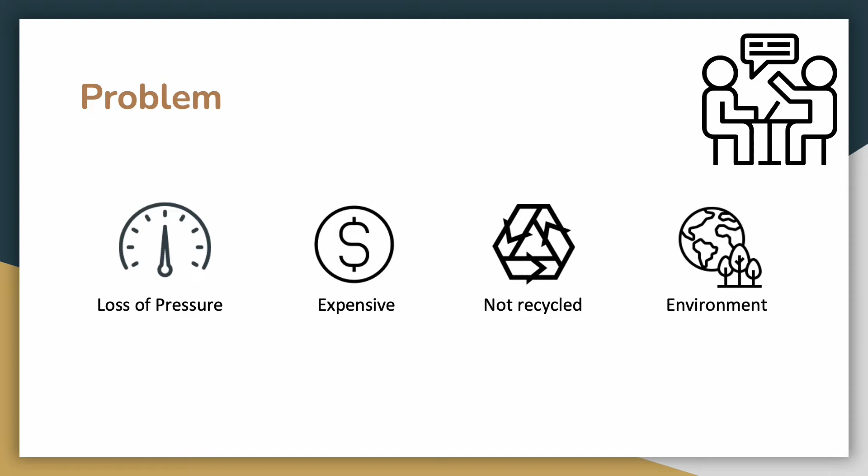A tennis ball has two failure modes. Either it loses pressure or it loses its outer fuzz. For most players, their ball will lose pressure way before the fuzz is used up. Average fuzz life is 4 to 5 times the pressure life.

Thus, our mission is to build a tennis ball recycling system that maximizes the play value of tennis balls by repressurizing used ones until their fuzz can no longer be used, which offers a cheap, sustainable, and environmentally friendly option for tennis players. We expect our customers to reduce the amount of tennis balls purchased by at least 60%.

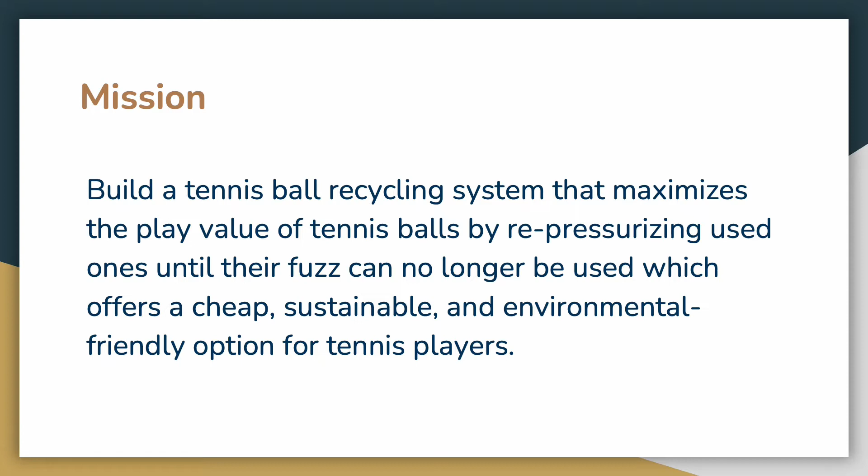The prototype of our tennis ball recycling system consists of 3 components: a fuzz detector, a pressure gauge, and a pressure tank. The fuzz detector and the pressure gauge work simultaneously to determine the fuzz and inner pressure condition of the ball, and determine if the ball is worth recycling and how long to pressurize it. If we are able to recycle it, the ball is pressurized in a pressurized tank through pressure diffusion.

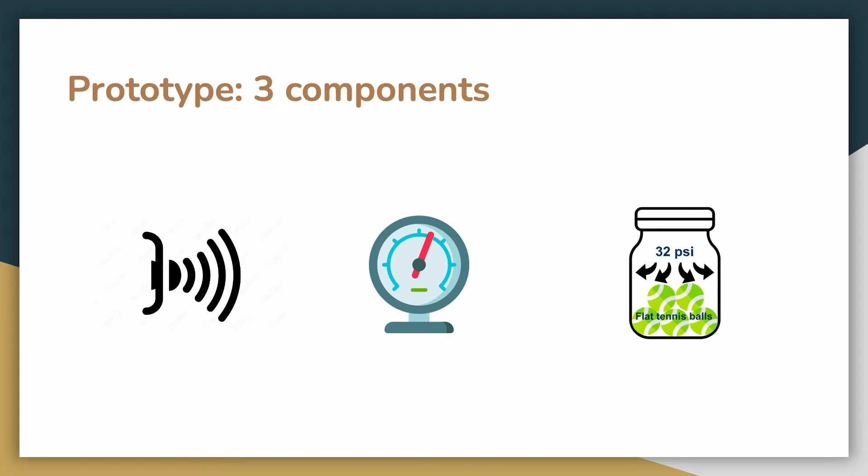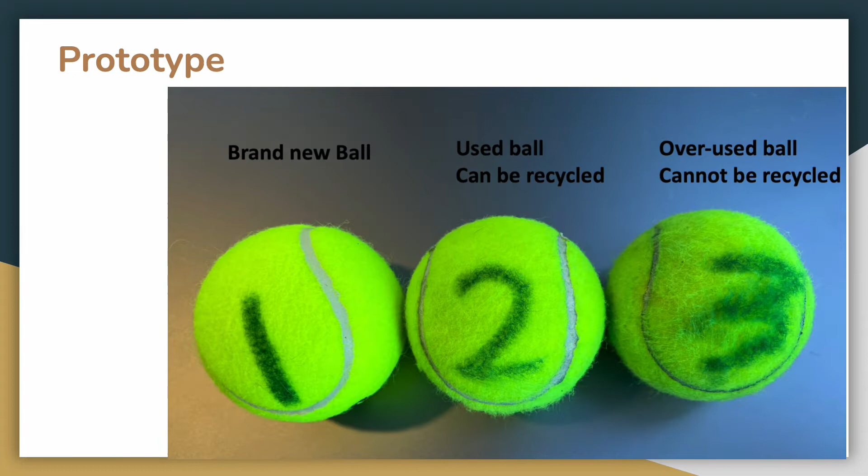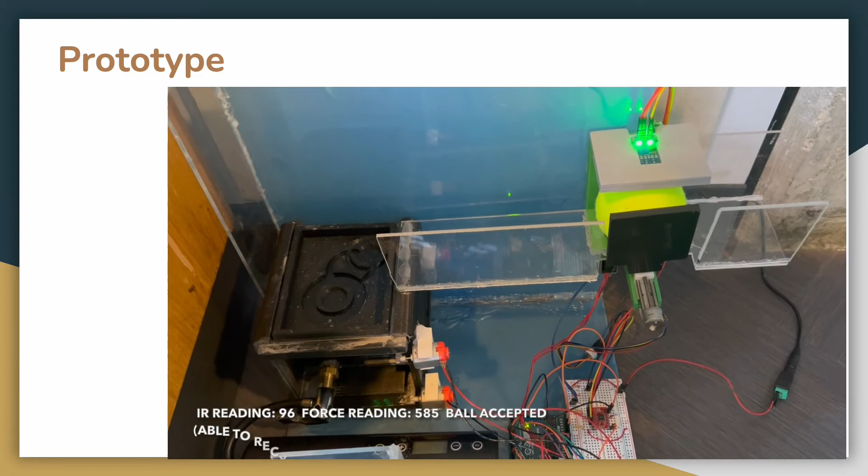A pre-recorded video is used to demonstrate our prototype. We demonstrate 3 balls in this video: a brand new ball, a used ball that can be pressurized, and an overused ball that cannot be played anymore. The first ball is a brand new ball. As it enters the station, the fuzz detector and the pressure gauge determine that it has almost perfect fuzz and pressure condition. Therefore, the gate of the pressure tank opens up, allowing the ball to enter and storing it.

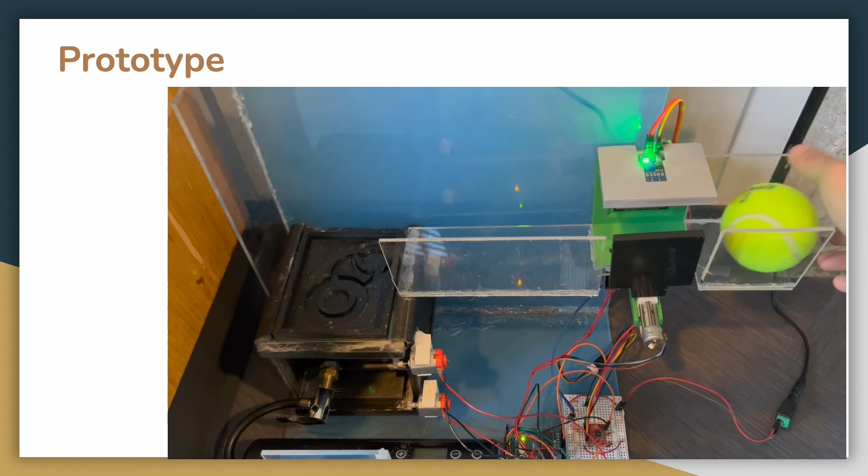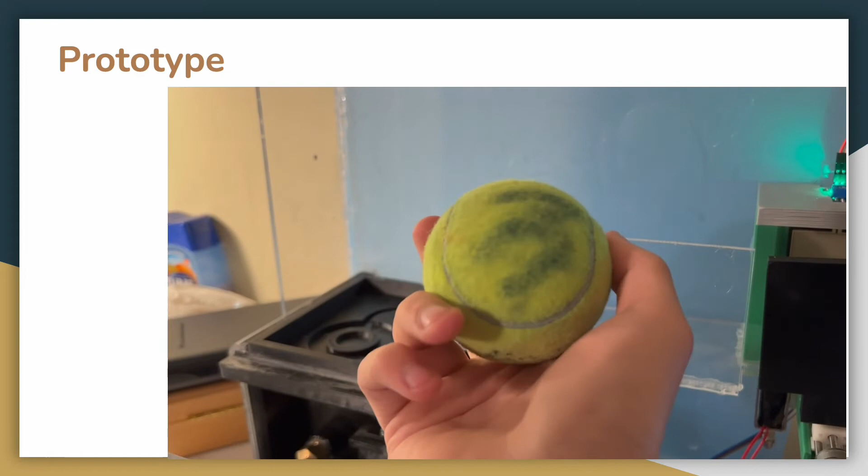The second ball is a used ball that still maintains a playable amount of fuzz but lost some level of pressure. The fuzz detector and pressure gauge determine how long is needed for the ball to recharge, and the ball is released into the pressure tank, waiting to be pressurized. The last ball lost almost all of its fuzz, thus is no longer playable. The fuzz detector determines this condition, and the ball is simply disposed without falling into the pressure tank.

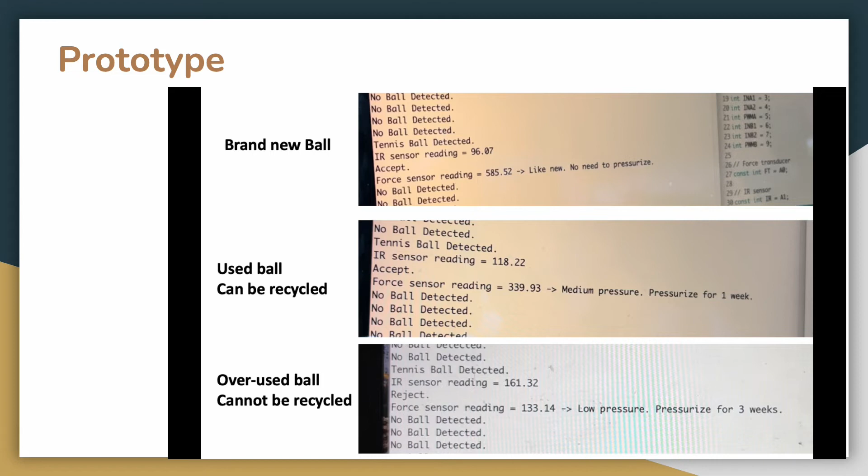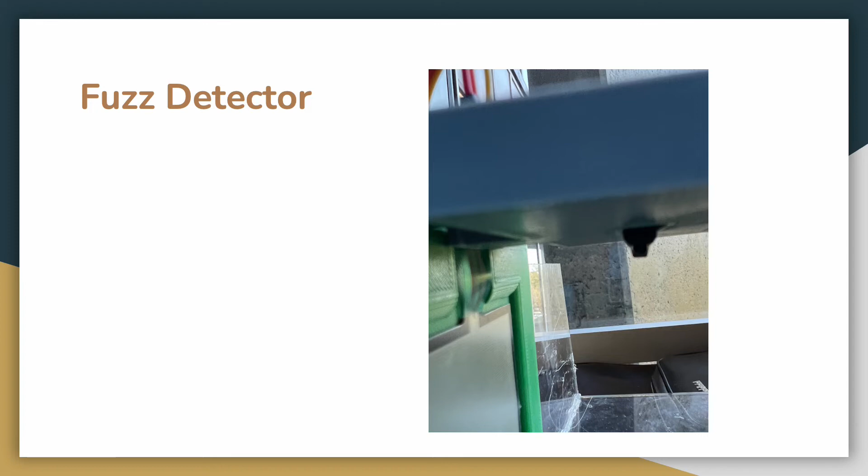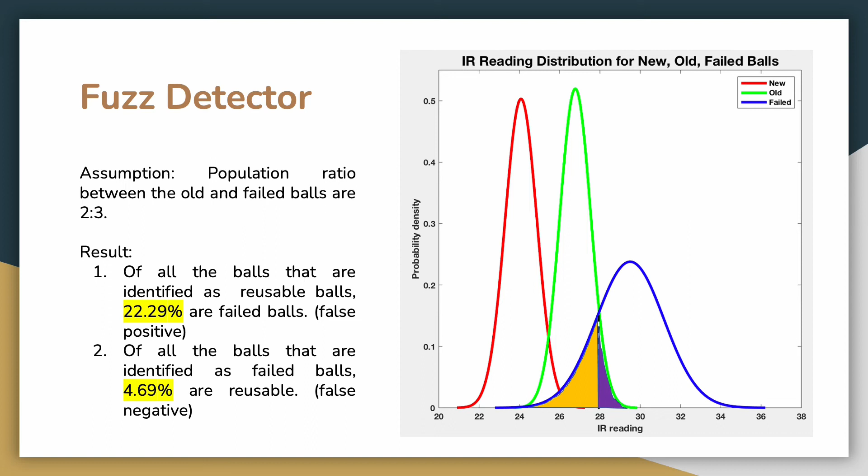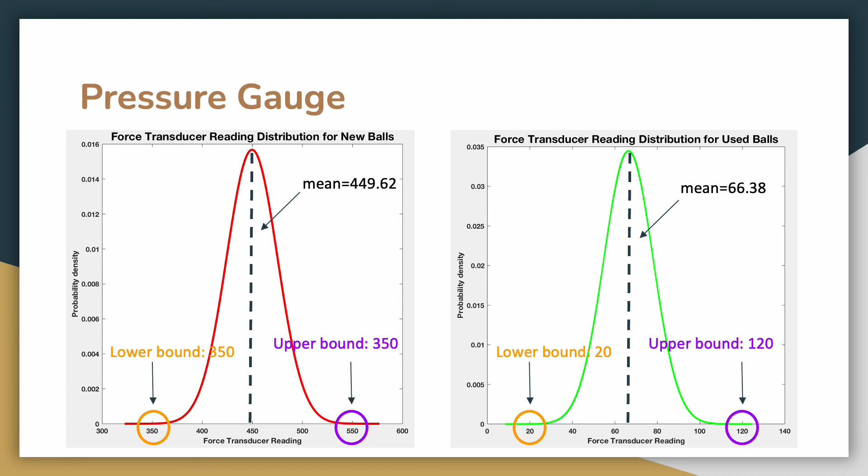The second component is the pressure gauge, which is mainly made of a press and a force transducer. These figures plot the distribution of force transducer readings for new and used balls. We can see that the mean values and bounds are significantly different from each other. This helps us to discriminate whether the ball needs to be pressurized or not.

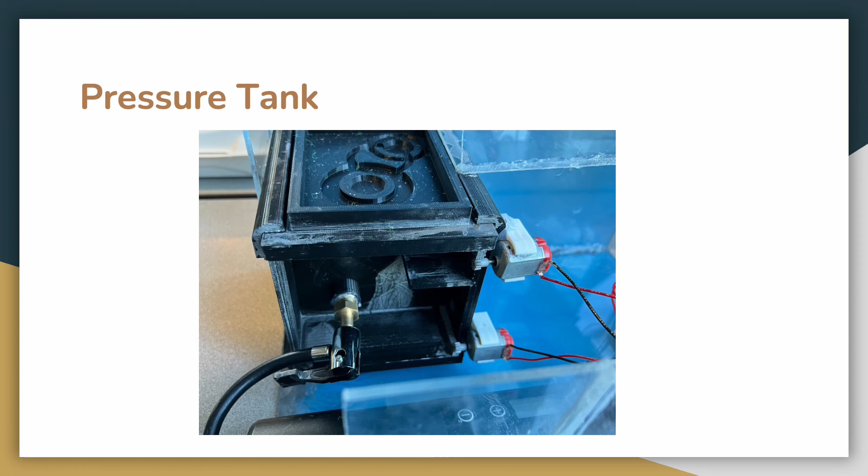The last, but also the most important component is the pressure tank, where all the pressurization of the balls takes place. Because it is impossible for us to directly measure the inner pressure of a tennis ball, we put a weight on the ball and measure its deformation, which is directly proportional to the inner pressure.